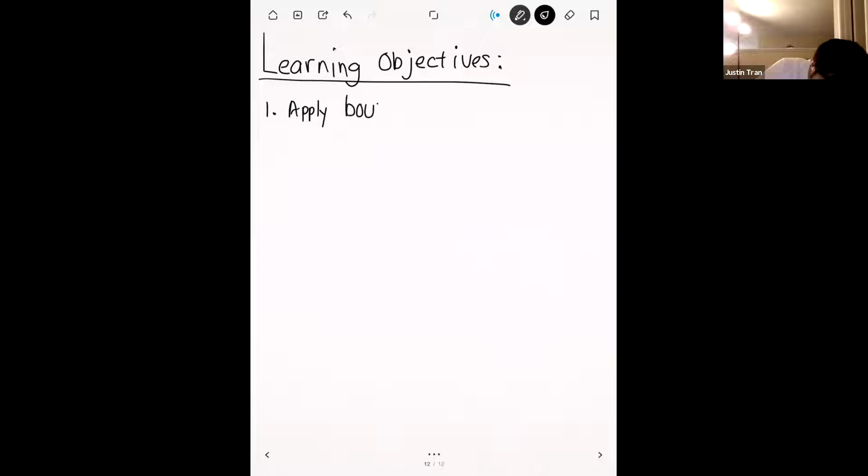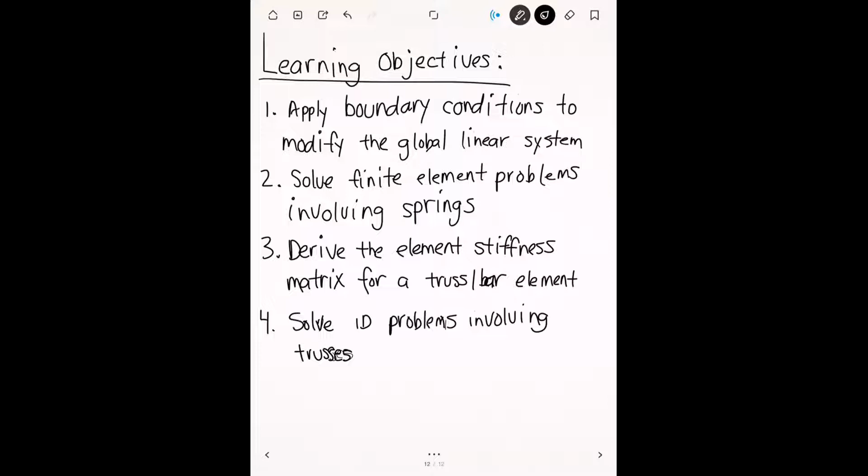Good, how about you? Busy. Good, busy, yeah, that sounds about right for this time of the semester.

Hopefully everyone's taking care of themselves. I know a lot of you are seniors, so senior design is probably ramping up quite a bit. This is usually the time senior design starts to dominate your life, so best of luck with that, but always remember your health and mental well-being comes first. Make sure you're taking care of yourself.

The plan for today is we're going to finish up our lecture notes on the direct stiffness method. We don't have too much more to go, just need to learn how to apply boundary conditions and do an example. That shouldn't take too long, and after that we'll start our next set of lecture notes, which is on trusses.

And what you'll see from trusses is that it's just another application of the direct stiffness method. It's just that the element stiffness matrix will look a little bit different.

But before that, I wanted to do a quick Ansys demo for you guys. It's not an activity, but over the last week a lot of people have been getting started on their projects, and the question I've been getting the most is how to come up with different loading scenarios. So I have a quick demo to help you come up with some other stuff, to help you better model certain situations you might have in mind.

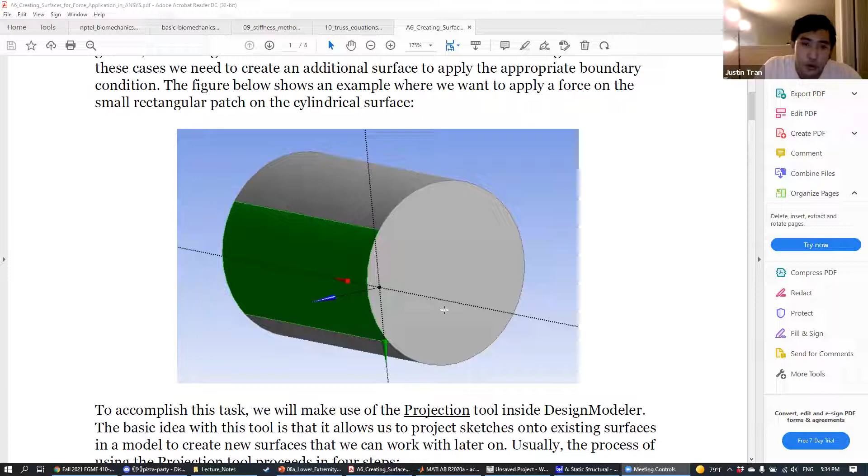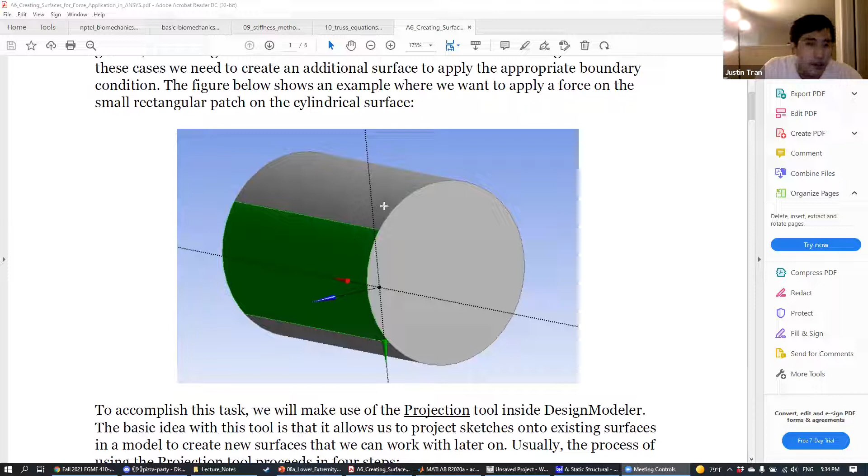If you have a certain type of geometry—I think this is probably most common for circular types—let's say you want to apply a boundary condition on just one region of the surface. Normally Ansys will model the entire cylindrical surface as one, so if you click anywhere on that surface, it selects the entire thing. But a lot of times you don't want to apply a boundary condition on the whole surface, sometimes just a small region. By default, Ansys doesn't let you do this easily, so what I'm going to go over today is how you would actually apply this in practice.

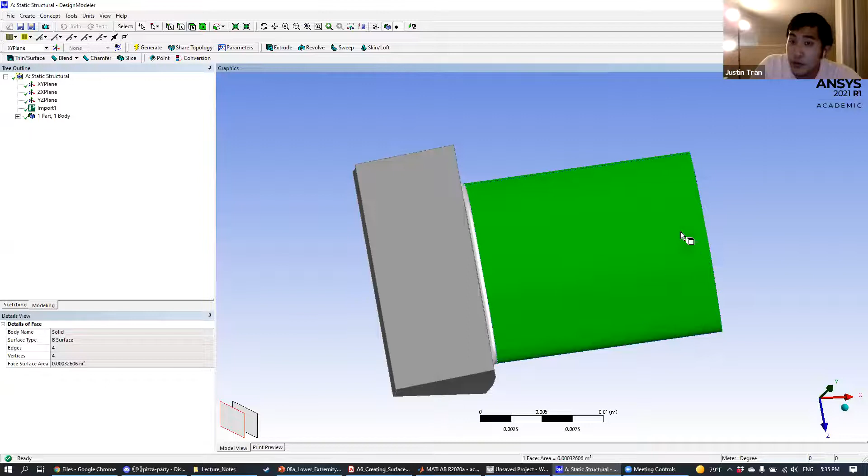I'm not sure if people are doing this one, but I think it's a really good model for applying a boundary condition on a surface, because you have a very large curved surface here, and maybe you don't want to apply a boundary condition on the entire thing. Maybe you want to simulate a case where some rock or object is hitting the turbine blade, but only in a small region. Right now you can't do that, because clicking anywhere on this surface just selects the entire thing. But let's say we want to apply a boundary condition on just a small region. The way we do this is we have to start with a sketch.

With the surface selected, click on sketching. This creates a new sketching plane within the plane of the surface. From there, you draw a region where you want to apply your boundary condition. Let's say I want to apply a boundary condition in a small circular region on the bottom right side of the fin here.

I'm going to draw a circle, let's say it's just about that big. Let's put some dimensions on this so we can see. For the diameter, let's set this to 0.0015. I'm just doing arbitrary values right now.

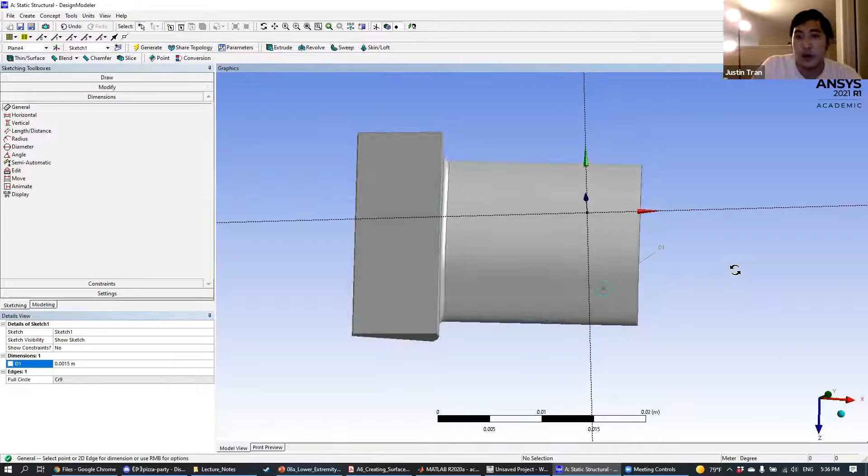Now that I've drawn this circular sketch, I want to project this sketch onto the turbine blade. That's going to create a new selectable surface for me to apply boundary conditions on. Now that we've drawn the sketch, that's all we have to do there, and you just define your region from there.

From here you have to do a few different steps, and this next one is a little non-intuitive. In order for Ansys to recognize this as a valid sketch of the geometry, you actually have to create a solid model from it. But we don't want to create an actual solid here, we just want a fake surface or fake solid, just so we can project this onto our geometry.

Since we've created this new sketch, sketch 1, we're going to perform an extrude. For the extrude, we're going to extrude this sketch in a certain direction. Let me lower this and make it a little bigger so you can see.

It's a little hard to see, but from this circle right here, I'm basically extruding a cylinder that looks like this.

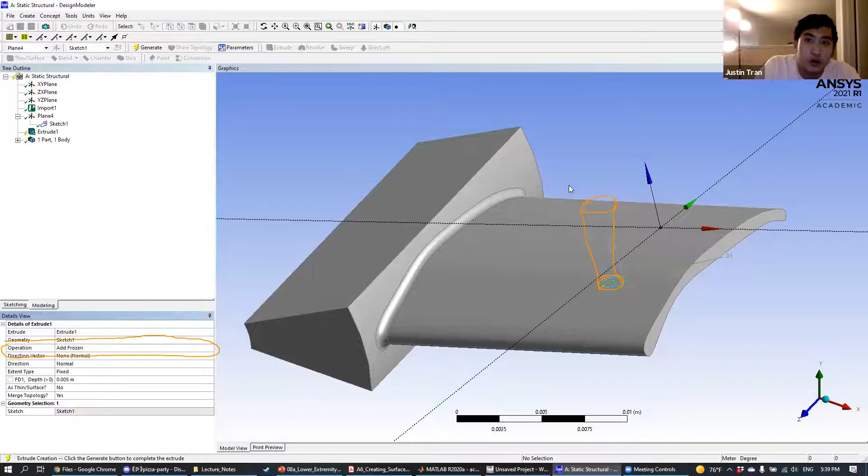What that's going to do is add a new frozen body, which is something we're not going to actually use in our geometry. Once you've specified add frozen, you can go ahead and click generate. You can see here that we've created this new appendage.

Now that this cylinder is an actual solid, we can take the sketch we created and project it onto the turbine blade. To do that, we go to Tools, and then Projection.

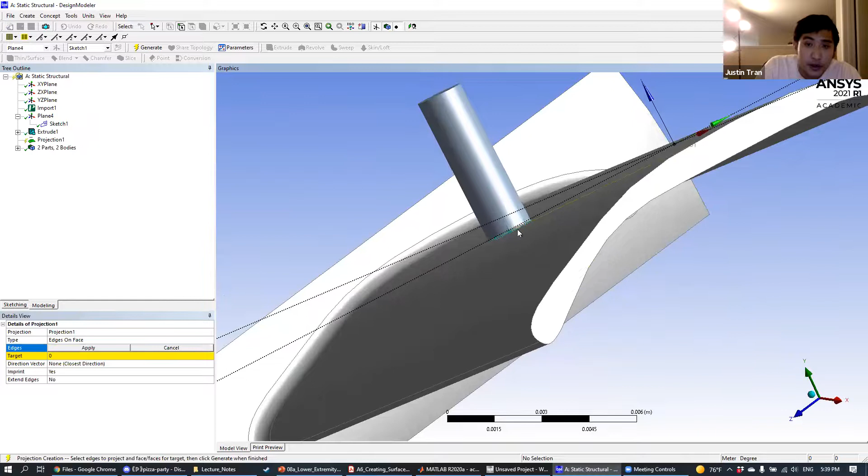Projection lets us take an edge of a surface we just created and project that onto another surface. The first thing we do is select our edge, so let's go to our cylinder down here and select the edge of that cylinder.

Then we have to select the target surface, which is what we're going to be projecting onto. I'll click on target and click on this entire surface, then hit apply. Once you've selected the edge and the target surface, we can go ahead and click generate.

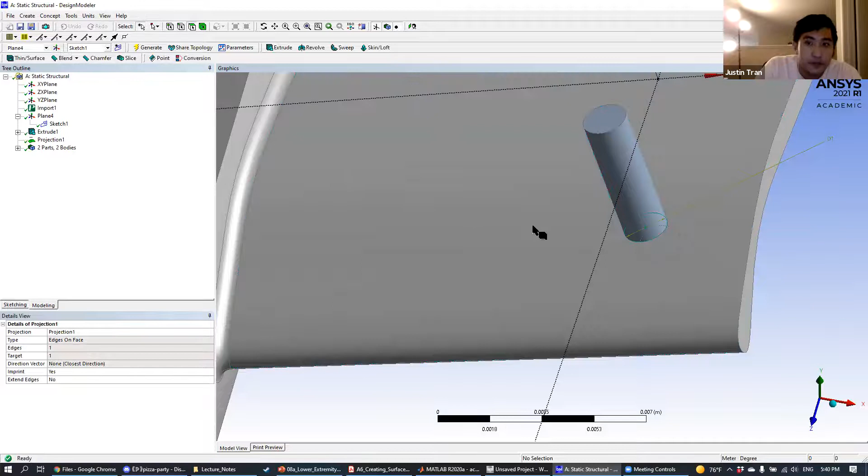Before, when we clicked on this turbine surface, it would make the entire thing green because that's the surface of the turbine. But now that we've projected this little circle, it's selectable for us to apply a different boundary condition.

If we want to apply a boundary condition, say we have an object striking this turbine blade here, then we can do that.

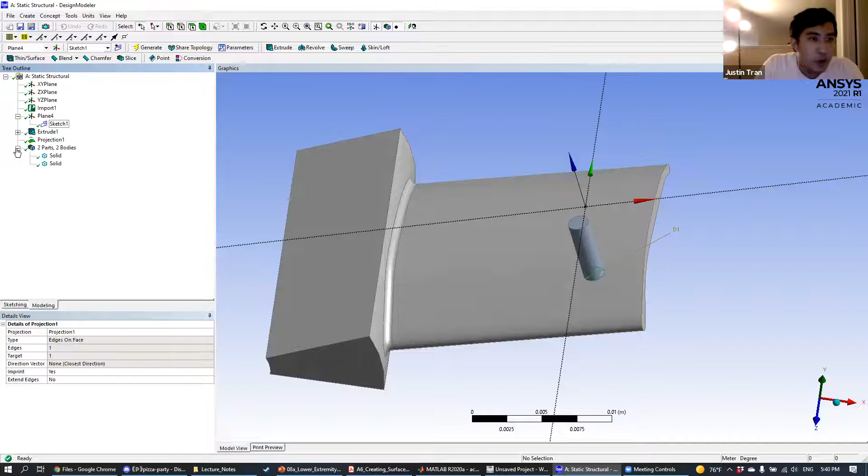The last thing we have to do is deal with this cylinder we created just for this projection, but we don't need it, so let's go ahead and suppress it. If you open up this tree, which shows all the different parts and bodies in your geometry...

You'll see the second body here is the one we just created. All we have to do is right click this and suppress it. Now we're back to our original geometry without any appendage.

Now we can select this little region right here to apply boundary conditions. If I close Design Modeler and open this up in Ansys, it'll let me select this little area to apply a different set of boundary conditions.

I just wanted to demo that really quickly, in case you find it useful for your project. You can use this technique to create different surfaces and be a bit more creative in the types of loading scenarios you come up with.

What was the benefit in doing the frozen?

In order to do the frozen—right now, just this sketch by itself isn't actually a valid surface, it's just a sketch. Ansys allows you to make a sketch maybe just for labeling purposes, but it's not actually part of the model yet.

If you go back to our projection method, part of the projection was that we had to select an edge, and that edge has to be part of an actual solid surface. We can't just select the sketch by itself and have that be an edge. So the reason we made it frozen was to take the sketch, extrude it a little bit, and from that create a valid edge. Then with that, we were able to project that edge onto the surface.

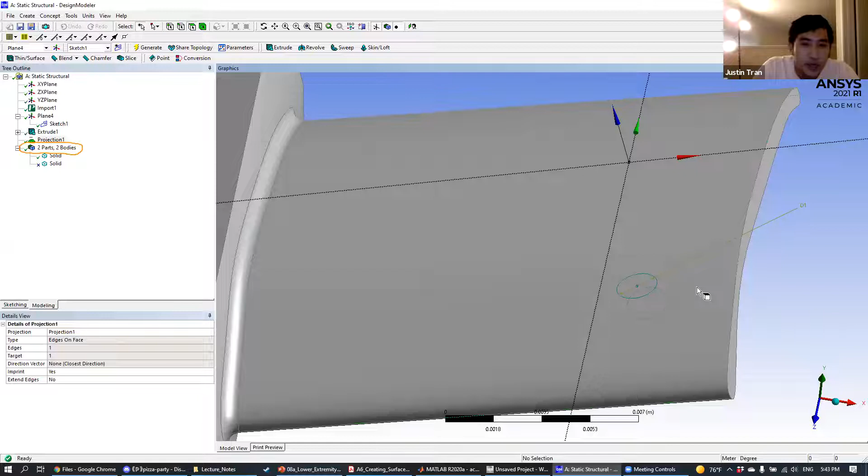Yeah, it's definitely not intuitive. You'd think that you would be able to project the sketch by itself, but I think the reason they have that is just so that you can create sketches without affecting your geometry at all.

All right, any other questions on this? Yeah, I have two quick questions. I got here a little late, so the plane that you made, it doesn't matter if it's exactly on the geometry. It could be offset off of the geometry and it would still work?

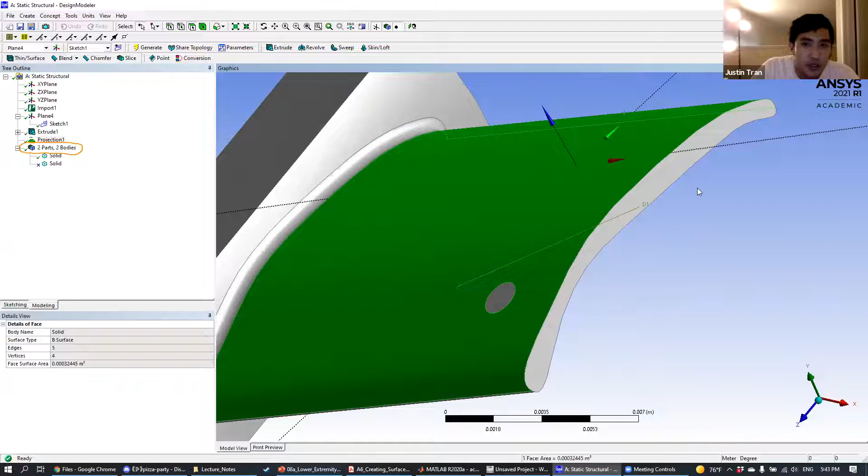Yeah, you can have it off the geometry. Actually for this one, you can see the plane I picked is a little bit off. I think the most convenient thing if you want to project something onto a surface is just to click on that surface, or I'll do a new one so you can see. Let's say I want to project something onto this surface. If you select that surface and click on the sketching button here on the left, Ansys is automatically going to create a sketching plane that's within the plane of that surface.

But if you select a curved surface, like this bottom one, and then click on sketching, the sketching plane it selects is going to be somewhere coincident onto that surface. But you can create the sketch anywhere on here, and then project it onto the surface. So if it's off by a little bit, that's totally fine.

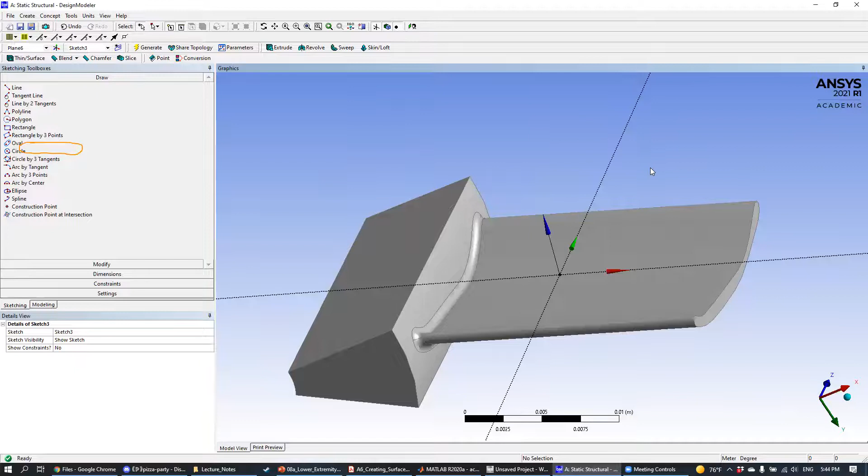Okay, thank you. And my other question is, then once we go back to the model, to the design model, we would have to change the thickness to be really small, right?

Actually, this method is a little different than in activity 3. In activity 3, it's the same idea where we want to create another surface for boundary conditions, but activity 3 actually created a shell on that surface. This is a little different — we're marking a different region on the surface, and we're not creating any new bodies here. So you don't have to specify any thickness at all; it's just a marked region of the geometry.

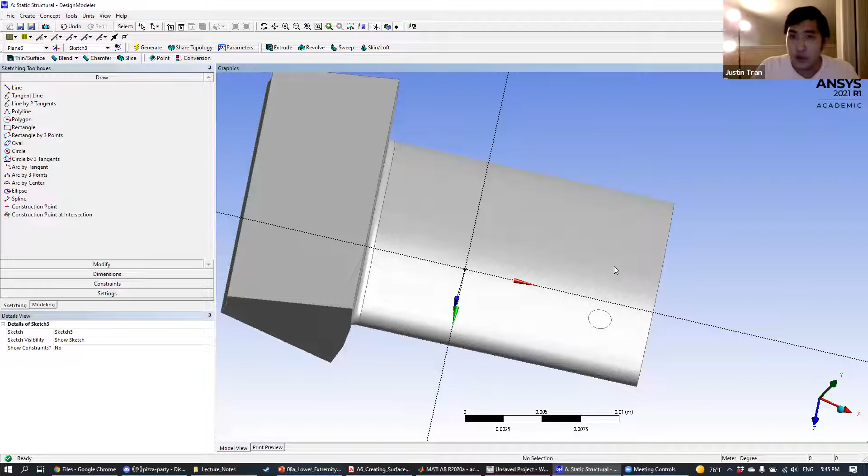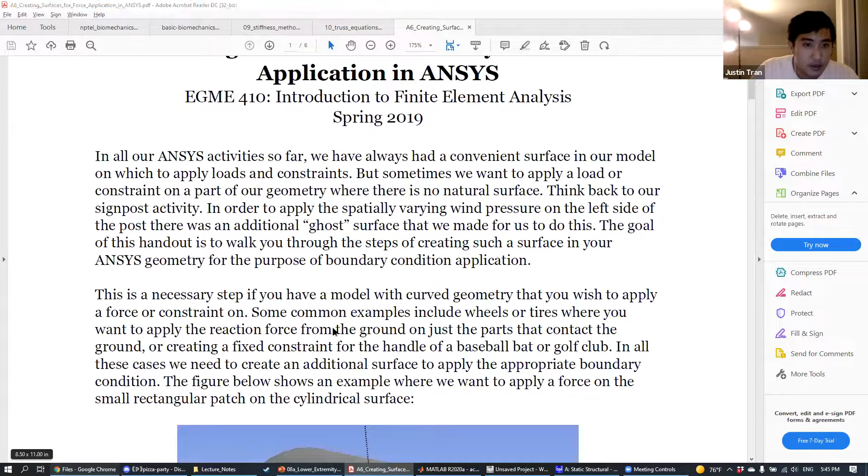Yeah. Okay, thank you. Yep. All right, hopefully that's useful for your project. If you want to read a document that goes through this, lecture notes A6 covers it, and you can find that here on the website. So let me go ahead and bring back my iPad.

We can go ahead and continue our lecture notes from Tuesday. On Tuesday we were discussing this direct stiffness method. The idea with the direct stiffness method was to give you guys a sense of how the finite element method actually works in terms of the mathematics and the setup, because so far all we've been doing is working in Ansys, which is a beast by itself.

Anytime you're learning new software, it's always a challenge. But as part of the finite element class, with this being the only option you have as undergraduates, it would be a crime not to show you a little bit of what's going on underneath the hood, particularly with regards to a lot of the terminology that's used.

Last time we talked about the element stiffness matrix and things like assembly and linear systems. These are all terms that are very ingrained in the finite element community. If you left this class without really understanding what those are, and someone tries to talk to you about it in industry, I'd be doing you guys a disservice if I didn't cover that stuff. We're in the middle of going through this entire process, but before we pick up where we resumed, let me summarize that whole process for you here.

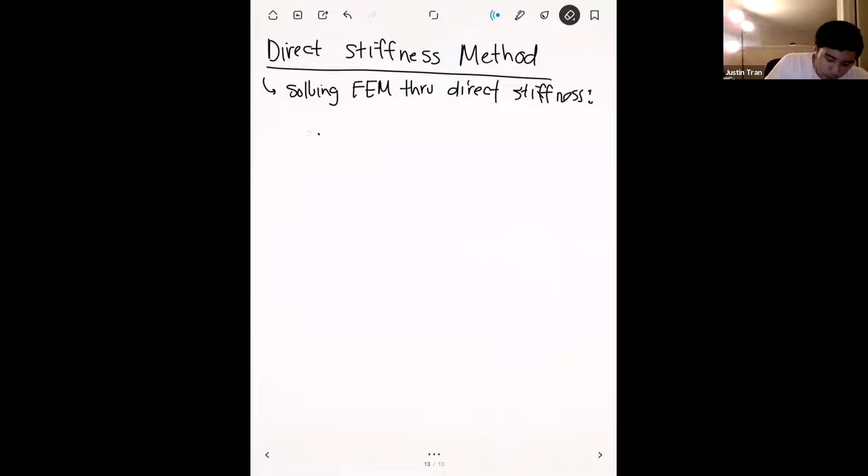The first thing you're going to do when you come across these direct stiffness problems is to form the element stiffness matrix for all the elements in your geometry.

So far we've only gone over a single element type, and that's a spring. But that's enough to get us started. Over the next couple of weeks, we'll be going over how to come up with a truss element stiffness matrix, and even a simplified beam. That's kind of where we're going.

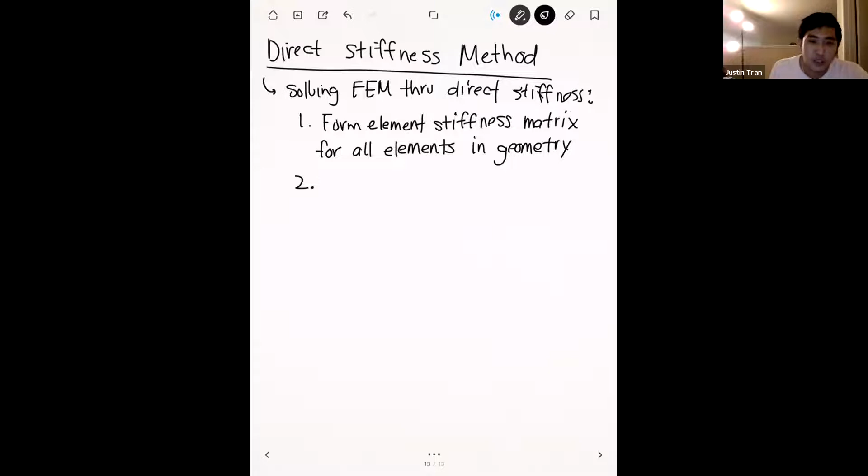The only thing that's really going to be different over the next few weeks is step 1, trying to determine what the element stiffness matrices are. Steps 2 and 3 are going to be the same for all of the direct stiffness problems that we have. Step 2 is to assemble.

So step 2 is assembly. Remember, assembly means to basically form the global linear system, because all the element stiffness matrices are kind of little baby linear systems. In order to solve for everything at once, we need to combine everything into one big linear system of equations.

Step 3 is kind of where we left off. Step 3 is to apply boundary conditions. The net effect of the boundary conditions, or what they're going to do, is modify our global linear system.

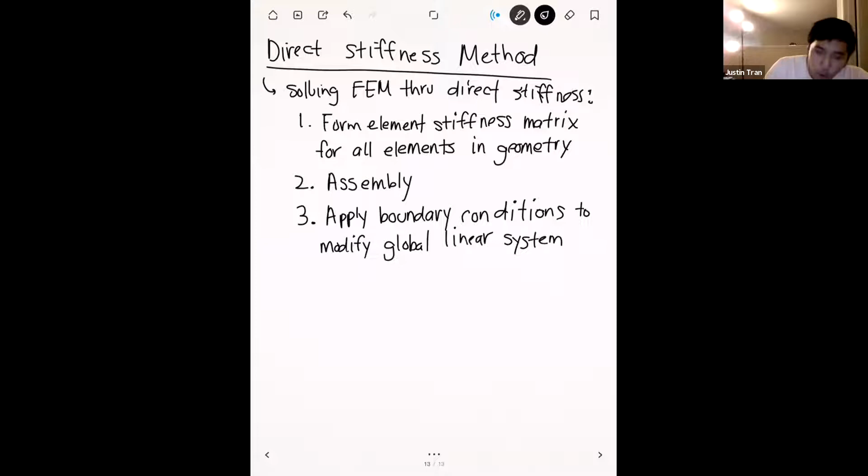The goal with the boundary conditions is to make it actually solvable. Because if you remember from Tuesday, after we assembled all of our element stiffness matrices, we ended up with a singular global linear system, which is something that we can't solve right now because you can't find the inverse of a singular matrix.

Once step 3 is done, that's all the hard part, and step 4 is simply to solve. Because these linear systems can get pretty big most of the time, this solve step most of the time is going to be performed with some kind of numerical tool.

The one I use is Matlab, just because that's what I'm familiar with. But apparently you can also solve linear systems in Excel too, or even, I know there's probably a bunch of websites out there where you can just punch in the numbers and solve it.

For this class, when I assign problems to you for homework, you're going to end up with big linear systems. I do not want you guys solving those by hand. I mean, you're welcome to, of course.

If you're really into that stuff, I'm not going to stop you. I personally am into weirder stuff than solving linear systems by hand, but that's why I'm not going to judge you. But I think for most people, it's going to be more time than it's worth.

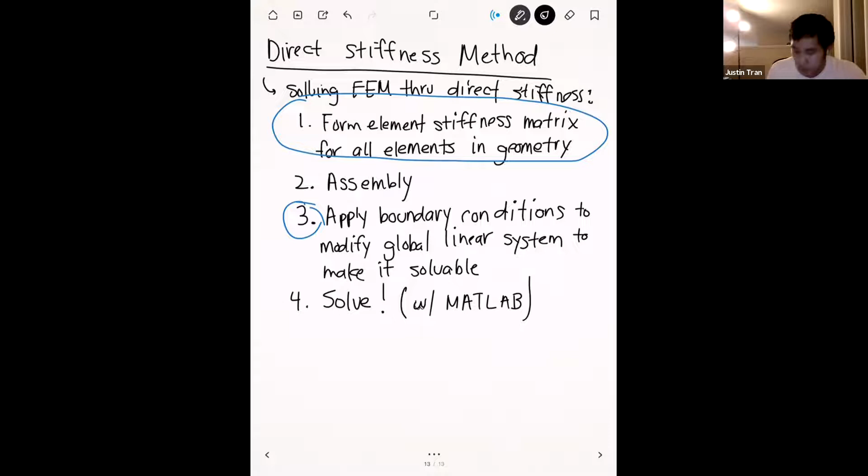All right, let's go ahead and pick up the walkthrough, not really an example, but the walkthrough of what we were doing before, and then let's talk about how we can apply boundary conditions.

The situation we were looking at: we had 2 springs connected to each other in series, and we're pulling on the springs with a force F. Our 2 springs have spring constants Ka and Kb - I'm using numbers for the nodes and letters for the elements.

The nodes: we have node 1 attached to the wall, node 2 between the 2 springs, and node 3 on the outside. Last time we formed the element stiffness matrices and assembled them into the global system.

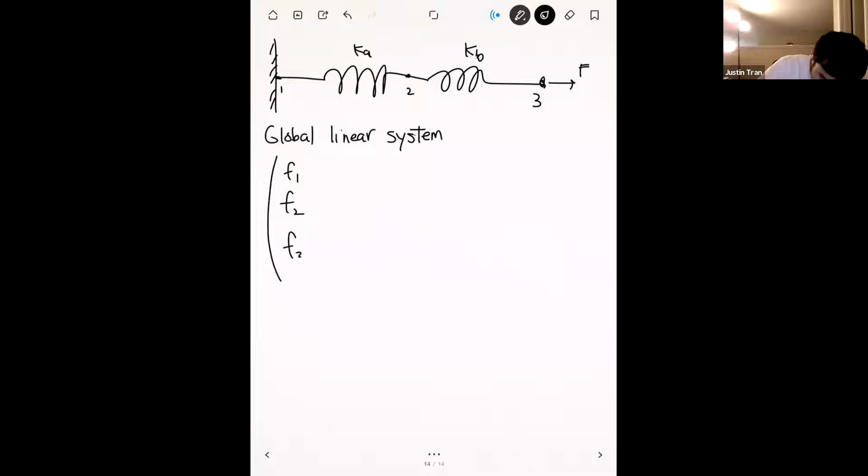Then we got a global linear system that looked like this. We had 3 nodes, so we have a 3 by 3 system: F1, F2, F3 equals the matrix Ka, -Ka, 0, -Ka, Ka+Kb, -Kb, 0, -Kb, Kb, multiplied by D1, D2, D3.

Remember, the way we got this was by placing the element stiffness matrices in their respective locations. Element A took up these slots because it was modifying nodes 1 and 2, whereas element B was occupying these slots because it was modifying nodes 2 and 3.

The next step to actually make this solvable is to apply boundary conditions. Just like I mentioned on the previous page, the boundary conditions are going to modify this linear system in order to make it solvable.

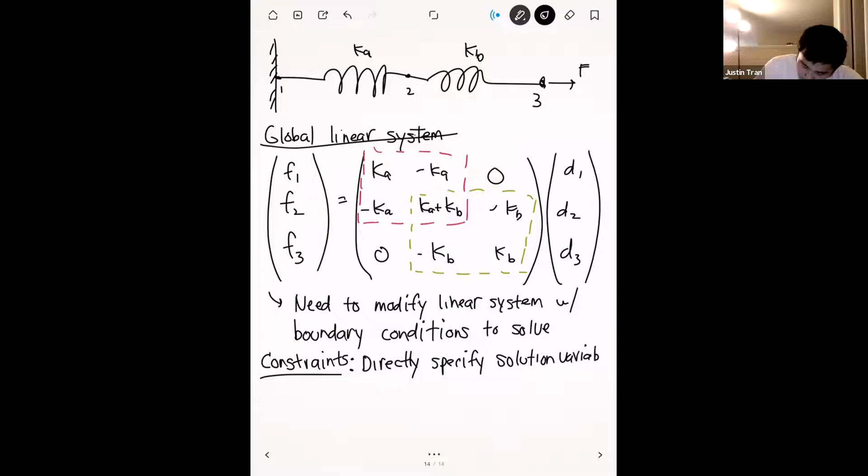So if you look at our geometry here at the top, and if you look at nodes 1, 2, and 3, you can see that node 1 here is subject to a constraint - in fact, it's fixed to the wall.

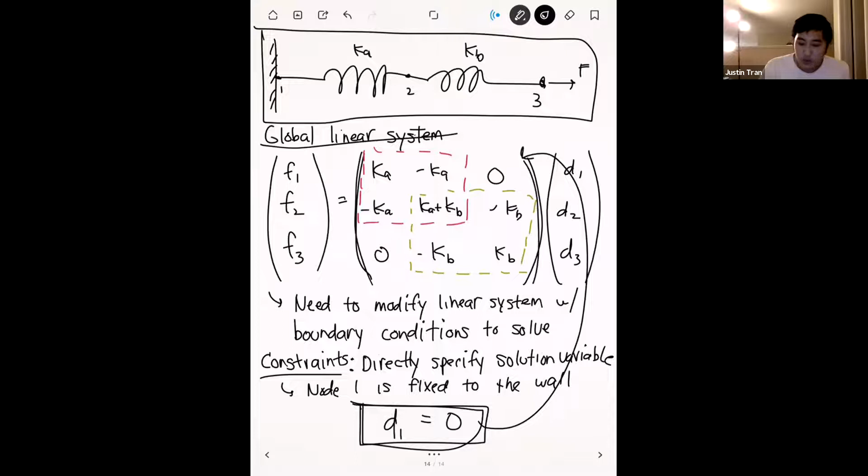To motivate what we're going to do, let's remind ourselves that this global linear system represents a system of 3 equations and 3 unknowns. To see that, we can perform this matrix multiplication. If we take this row of the matrix and multiply by this column vector, that's going to give us our first equation.

Just reading off the first row in the matrix, what we have is F1 is equal to KA times D1, minus KA times D2, plus 0 times D3. If we multiply across the first row in the matrix, that's exactly what we get, and so we get this equation.

Let's compare that to our boundary condition. Our boundary condition basically says that D1 is equal to 0. So another way we can say that is 0 is equal to D1.

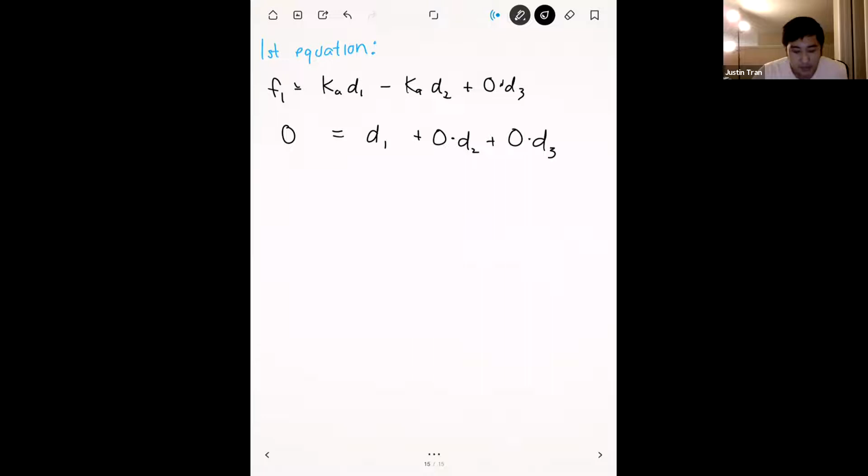Let me augment this equation to also include D2 and D3. If I augment this equation to say that this is also equal to 0 times D2 plus 0 times D3, when we multiply 0 by D2 and D3, it gives us basically the exact same thing, because 0 times D2 cancels out, 0 times D3 cancels out, and we still get D1 is equal to 0.

So why would I go through the trouble of adding these terms if they just cancel out anyway? The reason I did this is so that I can match the same form as the equation up here. You can see, if we compare this to the equation we got from the matrix, we have a D1 term, a D2 term, and a D3 term.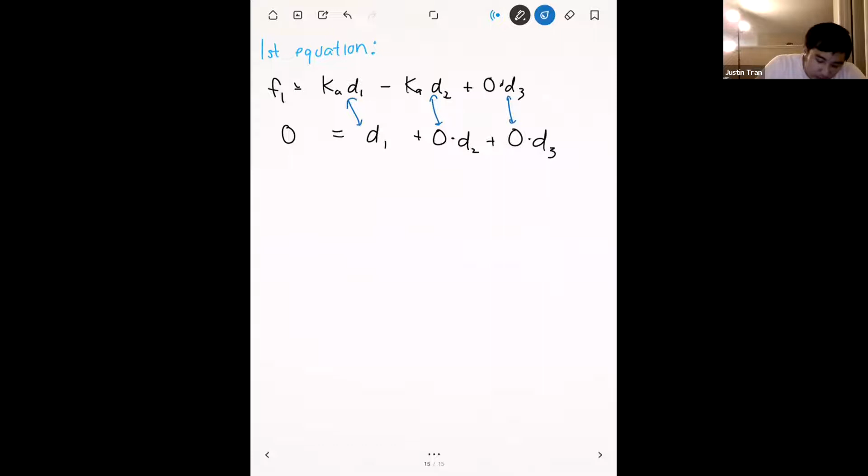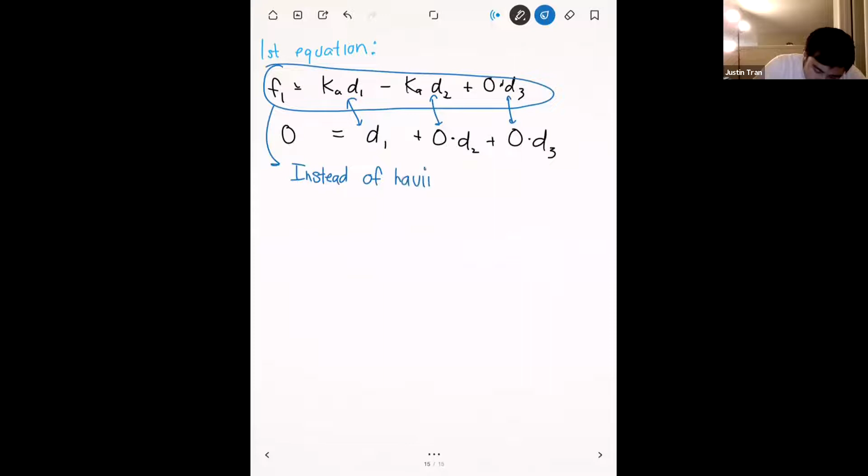So basically what we can do is say that instead of having this equation, why don't we just replace this with an equation that represents our constraint boundary condition?

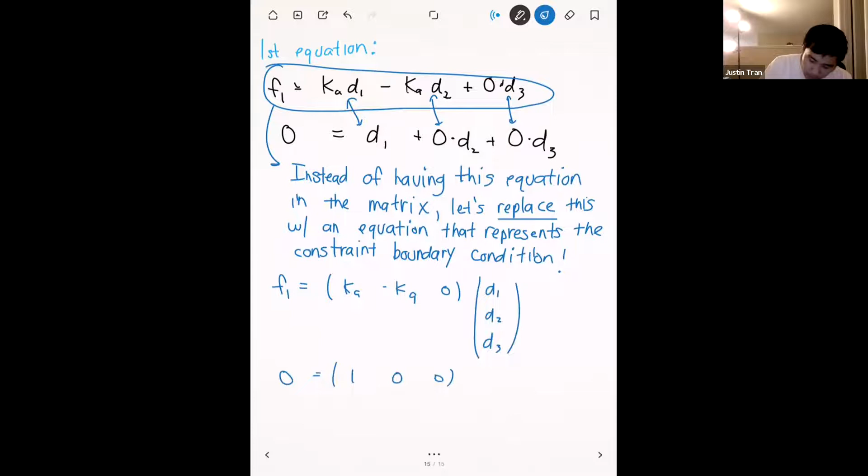So what would that row in the matrix look like? Right now we have F1 is equal to KA, minus KA, 0, times D1, D2, D3. What if we instead replace this with 1, 0, 0 times D1, D2, D3? This is an equation that will satisfy our boundary condition much more than the original one, so let's cross that one out.

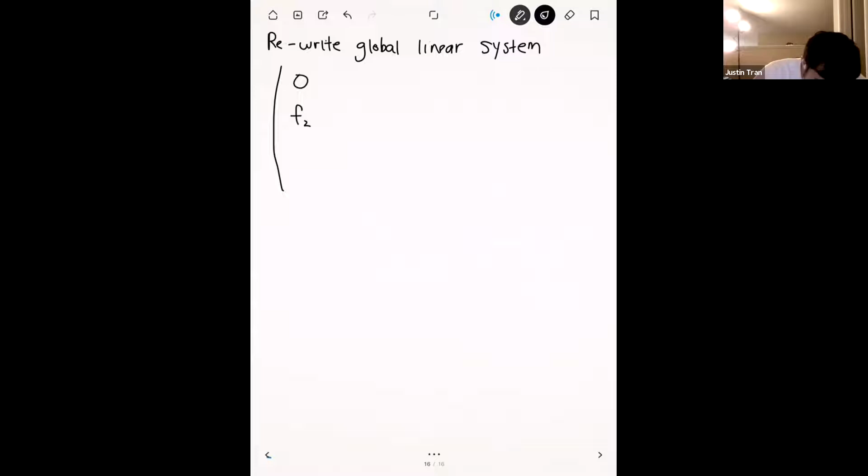Now let's rewrite our global linear system with this new equation instead of the old one. Before we had F1 up there, but instead we're going to have a 0 now, and the first row is now going to be 1, 0, 0. But the rest of the matrix stays the same: minus KA, KA plus KB, minus KB, 0, minus KB, and then KB. We have D1, D2, D3. So this is now our new linear system with the constraint boundary condition applied.

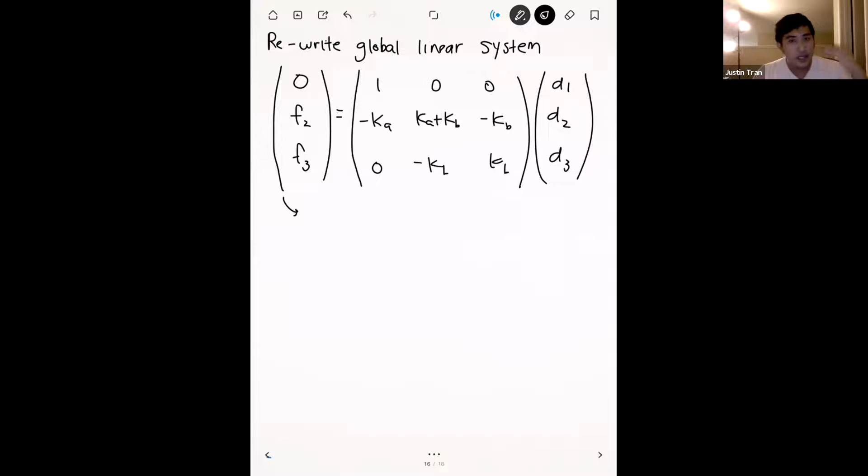So just to summarize what we did: whenever you have a constraint type boundary condition on a node, you're going to replace an entire row in the matrix with that boundary condition.

That's how we're going to do that. Any questions on constraint boundary conditions?

Is this saying that the applied force is 0, or could there still be reaction forces? Yeah, there could definitely still be reaction forces, and actually there will be, because there's a fixed support. But all we're saying right now is that the displacement is going to be 0, because when you're first solving the system, the thing you're solving for first is actually this.

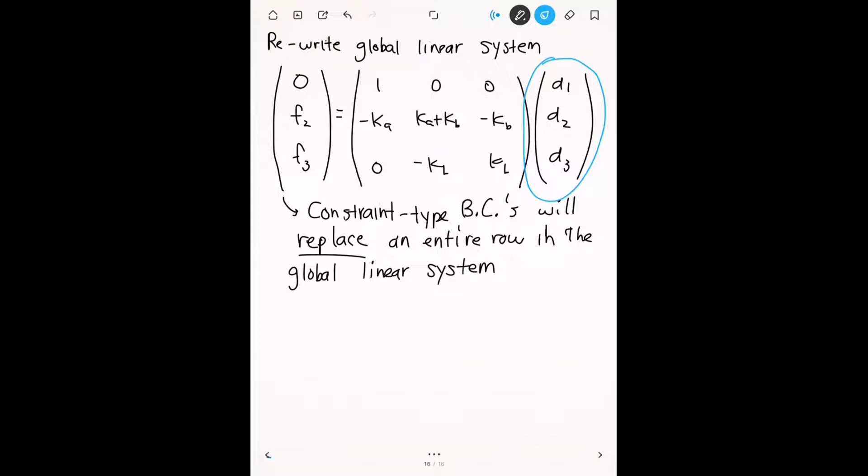Remember, displacement or deformations are our primary variables. So the first thing we solve for when we solve this linear system is that. And then once we have that solved, we can compute reaction forces from there. Okay, thank you. Yep.

So those are constraint boundary conditions, and that's actually the more complicated one. When you're doing these finite element problems, I would say do your constraint type boundary conditions first, because that changes the matrix quite a bit.

Next we have our loads types. Loads are really easy, because loads are not going to touch the matrix at all. The only place loads are going to modify is in the forcing vector, which is this vector off on its own on one side. So when you have load type boundary conditions, you basically just plop them right into the forcing vector.

Basically we're going to go load node by node here, and see what loads are being applied there. So if you have a node where no load is being applied, then you just put 0 there.

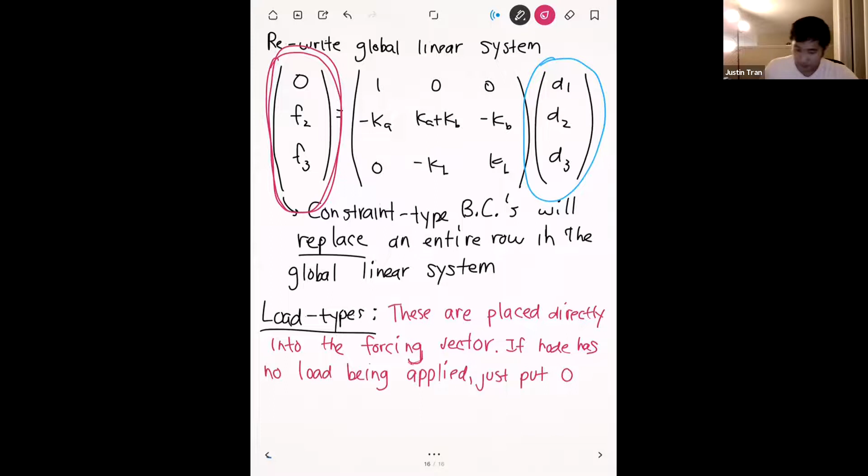Let's go node by node and see which loads are being applied. Let's start with node 2. We're not really doing anything to this node, so the load F2 is going to be 0. Then for node 3, you can see that we have a positive force F, so our boundary condition there is going to be just positive F.

Let's go ahead and put those in. For node 2, we have no load, so we put a 0 there. But for node 3, that's where our external load's being applied, so we're going to apply a force of F right there.

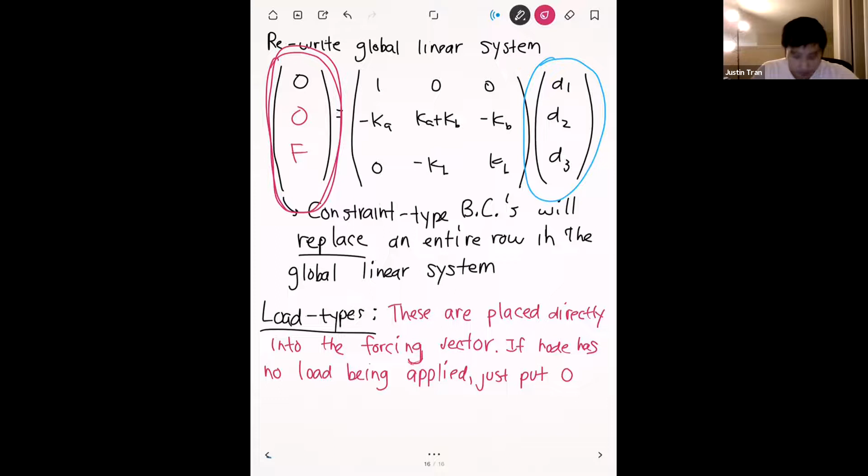With those things settled, we settle upon our final global linear system, and this one is ready to solve. Presumably you'll be given the values for the spring constants, and of course you'll be given the values for the loads. So this is a matrix you can just pop into Matlab or whatever your favorite way to solve linear systems is, and you'll be able to solve for D1, D2, and D3.

Next I'm going to do an example that takes this process from front to back, and has numbers in it too, so we can see the entire process in action. Before I do that example, are there any questions on this? Okay, let's go ahead and do that example. I think with the symbols and the fact that we went really slowly, it's hard to get a good sense of how everything fits together, so hopefully with this example it'll be a bit more clear.

Let's say we have a spring system that looks like the following. We have a wall right here, and one spring attached to the wall. Now let's say this spring is attached to a wooden block, and this wooden block itself is attached to two springs: one spring up top right here, and another spring right here.

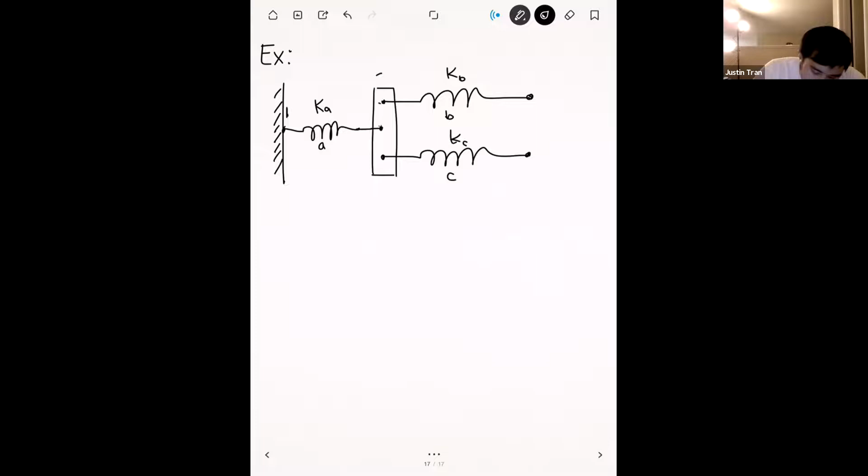And then the nodes, we have to label the nodes too. Node 1 is going to be attached to the wall on the left. This entire wooden block, because all these attachments are on the same block, this entire block is all going to move together, so we'll call this entire block node 2. This top node on the right we'll call node 3, and this node on the bottom we'll call node 4.

And we have two loads being applied, so on node 3 we have a force to the right, we'll call that F3. And node 4, we have a force to the left, we'll call that F4.

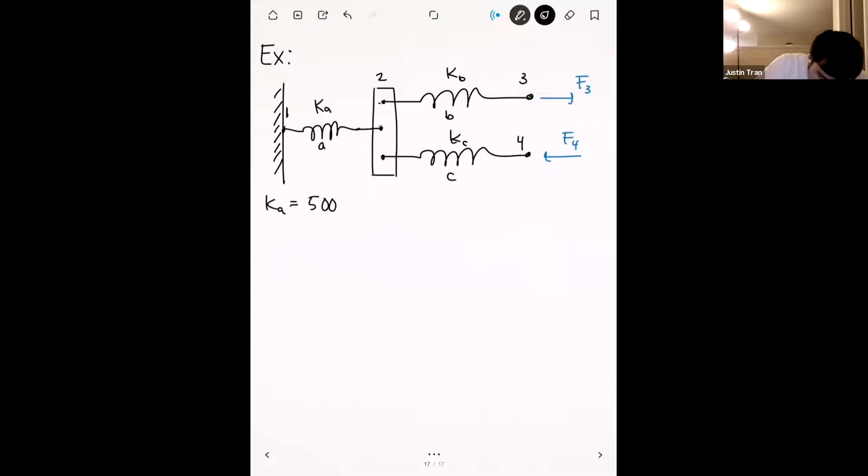Let me go ahead and give values for all of these parameters. Let's say that Ka is equal to 500 newtons per meter. Kb is 100 newtons per meter. And Kc is 250 newtons per meter. And the loads, we'll say that F3 is equal to 100 newtons, and F4 is equal to 50 newtons.

And the goal of this analysis is we're going to use the direct stiffness method to solve for the displacements of all four nodes.

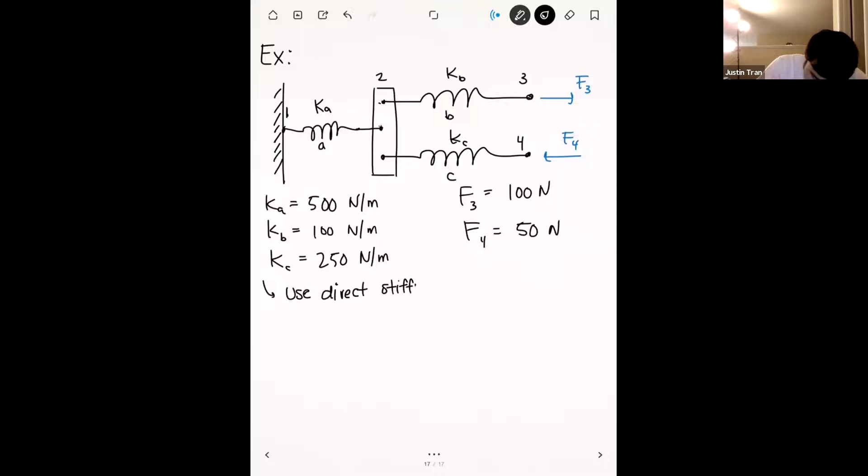This is a fresh, brand new finite element problem, and so we're going to take it from the top and walk through this entire process. Any questions on just the setup for the problem?

So let's go ahead and run through the entire process. Remember, the first thing that you have to do when you come across a problem like this is we're going to write out all the element stiffness matrices for the elements.

So here we have three elements: element A, element B, and element C. So we're going to have three element stiffness matrices, and they're all springs. Remember, for a spring, our element stiffness matrix system looks like the following.

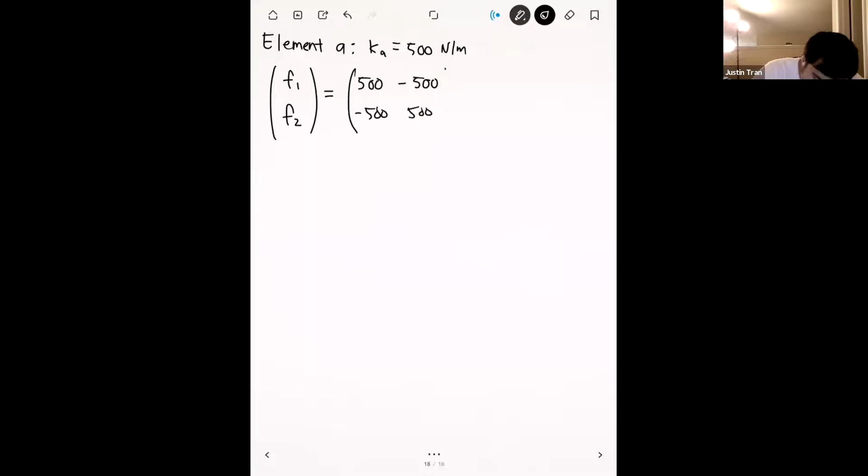Let's start with element A. For element A, remember we have Ka equal to 500 newtons per meter. The element stiffness system for element A is going to be F1, F2, because element A here is touching nodes 1 and 2, so those are the two node numbers that we're going to use. We're going to put in the spring stiffness now: 500, minus 500, minus 500, 500. And this can be multiplied by D1, D2.

Element B has a Kb of 100 newtons per meter, and the nodes that element B works on are nodes 2 and 3. So the element stiffness matrix for element B is F2, F3 equal to 100, minus 100, minus 100, 100, and then D2, D3.

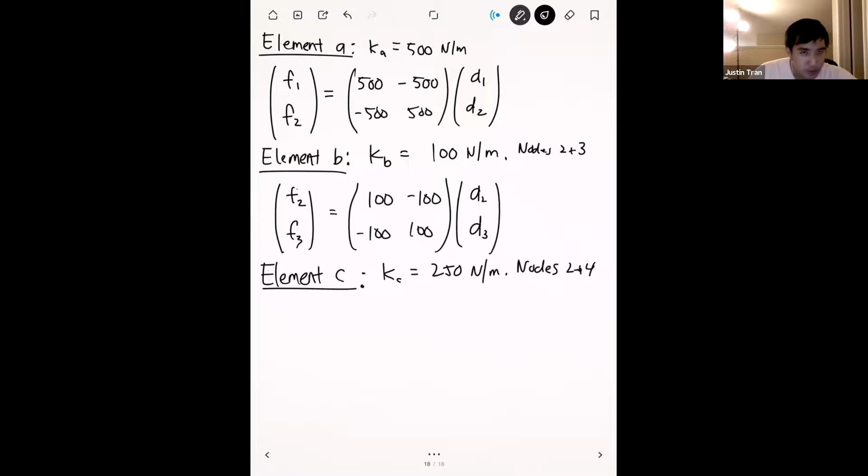Finally, let's do element C. The Kc, or spring constant, for that one is 250 newtons per meter, and the nodes that it works on are nodes 2 and 4. This one's going to be interesting to assemble because it's not all going to be in one contiguous block. So for element C, we have F2, F4 equal to 250, minus 250, minus 250, and 250, times D2, D4.

So we've written out all the element stiffness matrices, and the next step that we're going to do is assembly. Any questions on this?

It wouldn't matter, right, if we have our lowercase f as capital F? Oh yeah, no, that doesn't matter, you can call it whatever you want. Okay, thank you.

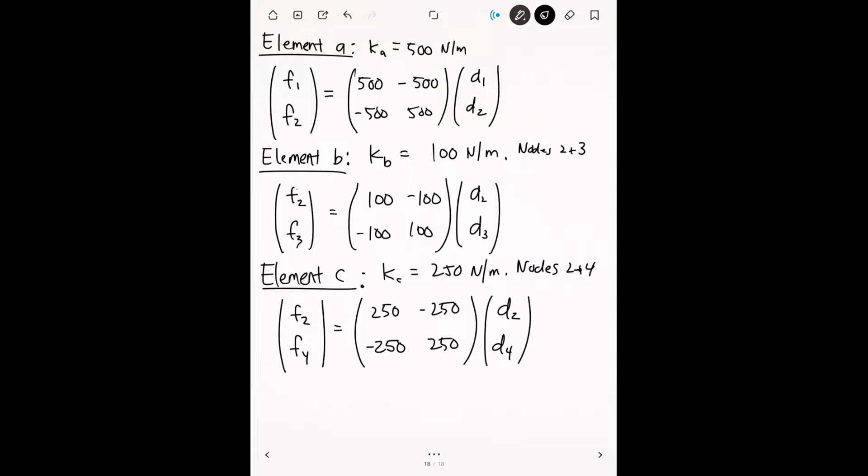Okay, so let's go ahead and put together our global linear system and see how all of these fit together.

All right, and so the next step, now that we have all the element stiffness matrices, is assembly.

Here we're going to have a 4x4 system because we have 4 nodes. So we have F1, F2, F3, F4, and then we have D1, D2, D3, D4. Just to help us with organization, I'm going to go ahead and label the columns as well.

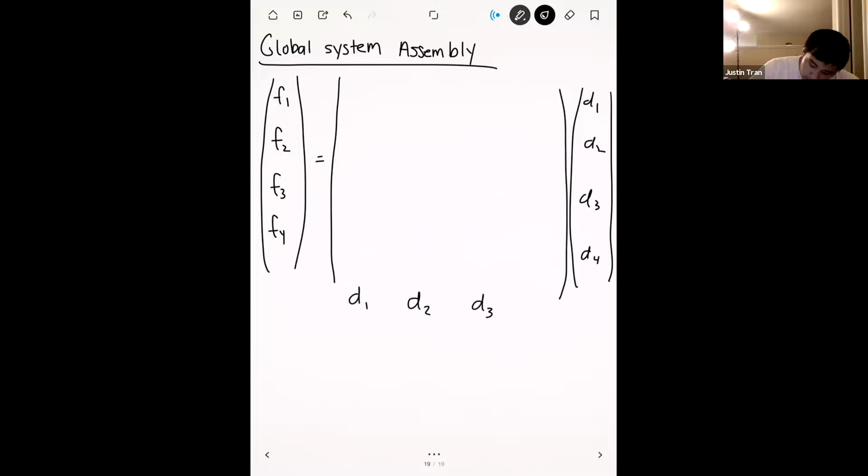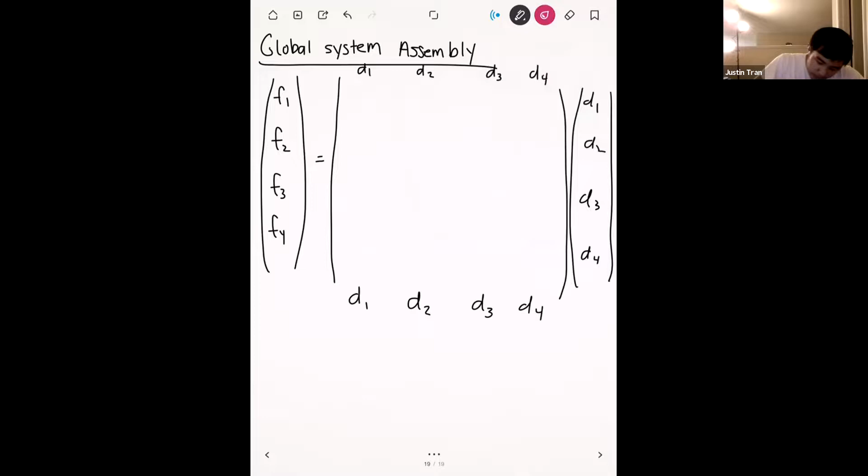All right, let's go ahead and start assembling the element stiffness matrices here. I'm going to use colors just because I can, just to make it a little bit easier to see.

Let's start with element A. Element A we know works on nodes 1 and 2, so it's going to be on the D1, D2 block of our global linear system. We're going to go to all the columns that have D1 and D2 and all the rows that have D1, D2, and you can see that they all intersect in this region right here. That's going to be element A, covering that region because that's everything that has to do with nodes 1 and 2 combined.

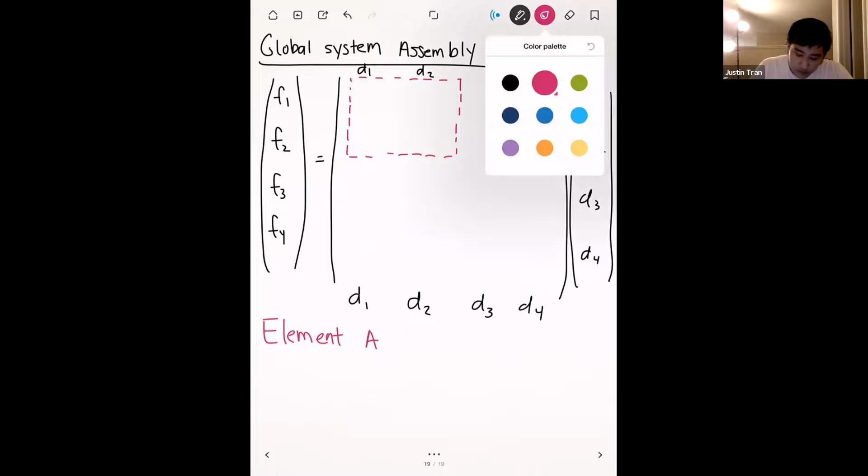I'm not going to fill in the values just yet because I want to focus on just locating these elements first.

Element B works on nodes 2 and 3, so we're going to go to all the rows and all the columns that have to do with 2 and 3, and that's going to cover this region right here. You can see that we have overlap on node 2, the D2 spot, and that makes sense because both elements A and B are going to be interacting on that spot. They both border that node.

All right, finally let's do element C. This is the interesting one. Element C, from the previous page, we know borders nodes 2 and 4, and 2 and 4 are actually not connected in this linear system at all. I think the tempting thing when you're first starting out is to make a box around this region, because that's kind of what we've been doing. But element C here doesn't touch node 3 at all. If you go back to our original diagram, node 3 is up here, whereas element C is down here.

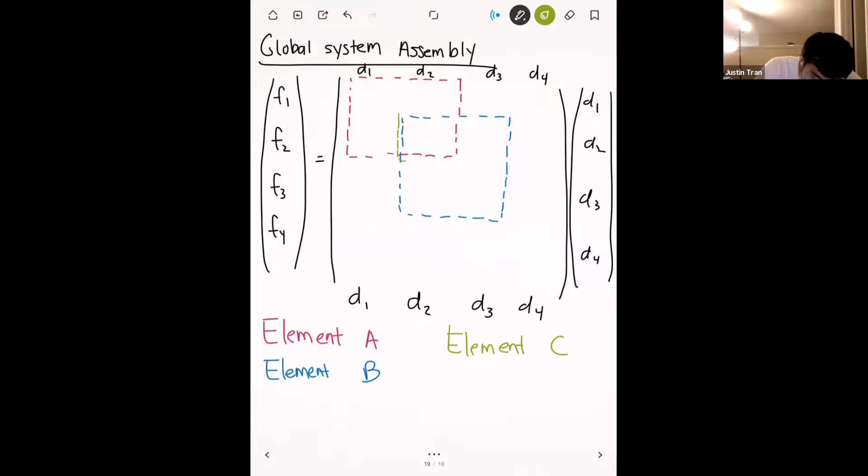Let's start by looking at all of the regions that are crossed by 2 and 4. The first one we're going to do is D2, D2. We have the D2 column right here and the D2 row right here, and you can see they intersect on this D2, D2 spot. So we're going to have another green border around here. This spot right here is very popular, so all 3 element stiffness matrices are going to be modifying it.

Next we have the D2, D4 slot. We have the D2 row, D4 column, and you can see they intersect on this spot right here, so we're going to draw another box right here. Same thing for the D4 row and the D2 column, so that's going to be right down here. And then finally we have the D4, D4 spot, which is right here.

All right, and so those are all the locations where you're going to insert the element stiffness matrix for element C. Okay, so any questions on why we chose these locations for these elements?

And of course, just like we did last time, any place that's not boxed, we can just go ahead and fill in a 0 for those locations.

Okay, so now that we have the locations picked out, let's go ahead and insert the values. Let's do element A first. Element A's spring constant is 500, and so we do 500, minus 500, minus 500, 500.

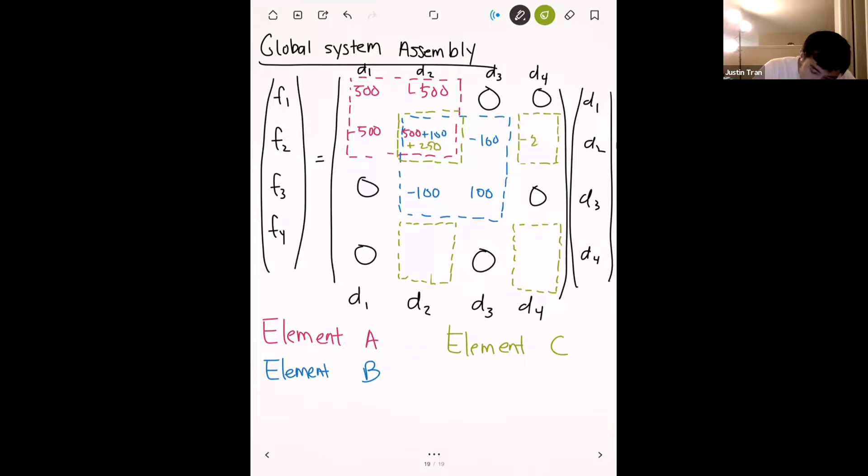And finally, element C. Element C we have 250. So we're going to add 250 on this spot right here - it's getting a little bit crowded. Minus 250, minus 250, and 250.

All right, and so the only place where we actually have any overlap is on D2, D2. So let's go ahead and perform this arithmetic. We have 500 plus 100 plus 250, and that gives us 850 overall.

Okay, and so now we have our linear system here, and then we're now ready to apply boundary conditions. Any questions on how we got this?

All right, and so last thing that we can do here is we can go ahead and apply the boundary conditions so that we can actually solve this. And so we have 3 boundary conditions here.

And so we have one constraint here on node 1. Remember, when we have a constraint boundary condition, that's going to replace the entire row. So we're going to replace this entire row with zeros on all the off-diagonal parts, and then a 1 on the main diagonal.

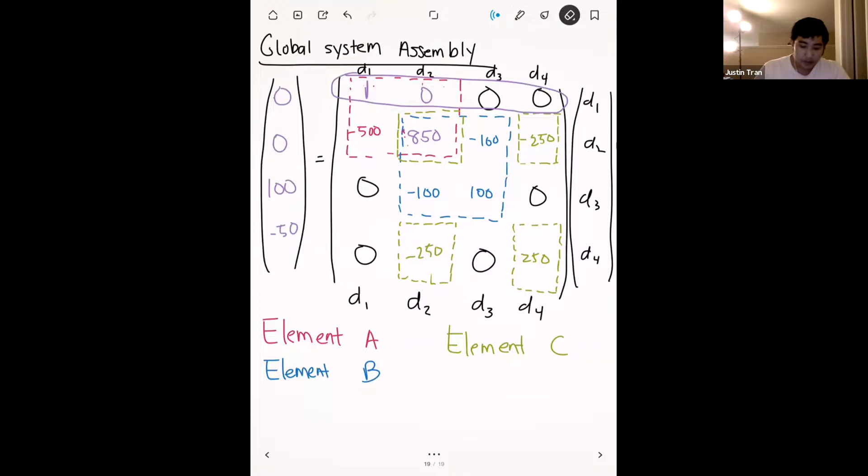And then node 2, since we don't have any loads there, we're just going to put a 0 there. All right, and so now our global linear system is complete.

And so what you can do from here is you can just insert this into Matlab or whatever program that you like to solve for linear systems. And so again, please don't solve this by hand unless you're into that stuff. But I did this in Matlab.

Okay, and so if you do this in Matlab, we get the following solutions. If we plug this in, we get D1 is equal to 0, which makes sense because that's our fixed support.

D2 is equal to 0.1 meters. D3 is equal to 1.1 meters, and D4, because we're kind of compressing that node in, we actually get a minus 0.1 meters.

And there's our solution.

All right, so we have about 15 minutes left, so let me show you the code for how you can actually input this in Matlab, just so that you have those tools available, and then whatever time is left, we'll use that to start the truss equation notes.

Any questions on this before we jump into Matlab?

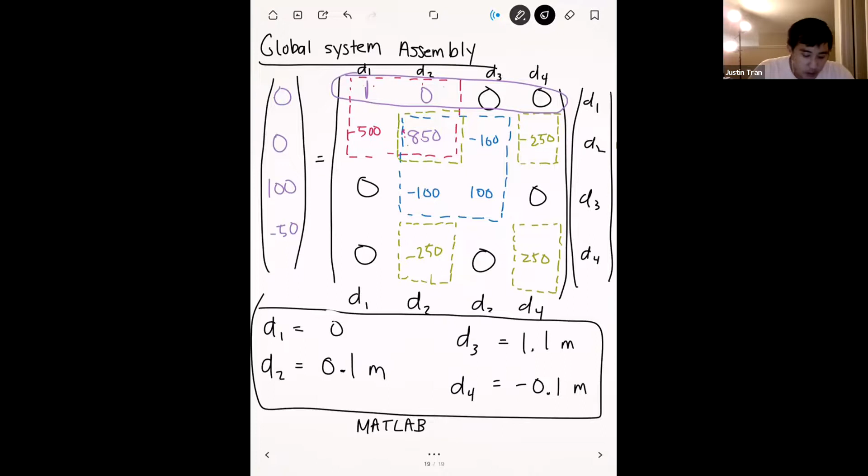All right, so to solve linear systems in Matlab, you basically only need to do a few things. First we're going to basically put this matrix here and encode that in Matlab. Then the other thing we need to do is put in the forcing vector and put that in Matlab. Once those two things are in, then Matlab can just take us from there.

All right, so let me go ahead and switch back to my laptop screen. Let's see, does everyone have this matrix written down? Because we're basically going to be inputting these values kind of directly into Matlab.

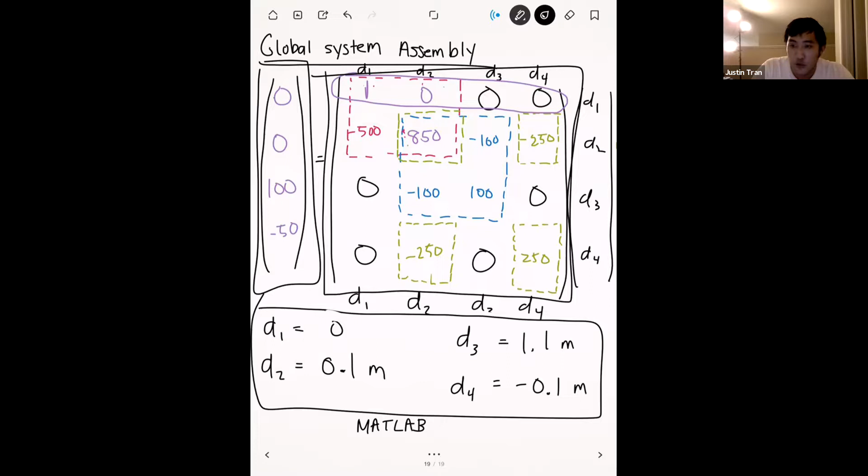Quick question, sorry. Sure, it just popped in - regarding node 2, would it matter the placement of the nodes?

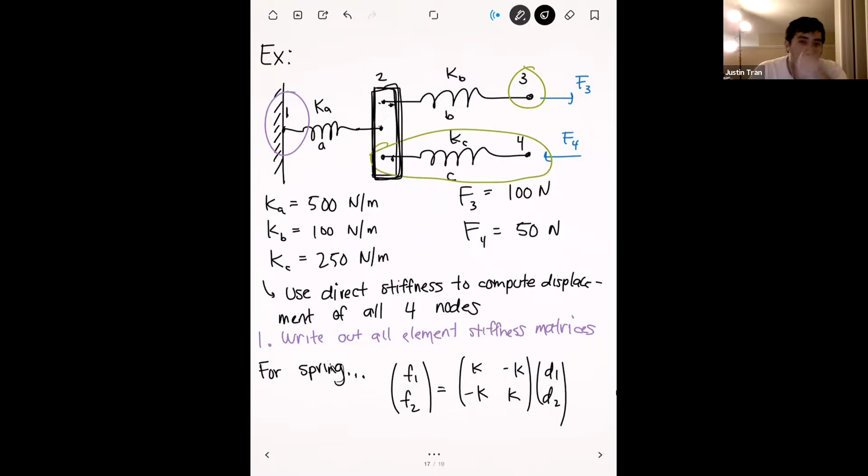In this case, I'm assuming all the nodes are directly on top of each other. But would it matter if the one connected to node 3 or node 4 were offset from that axis? For this case, it doesn't matter too much. The important thing is that all of those things are going to displace and deform together, because they're all attached to the same block, and we're going to assume that the block is relatively rigid. So if you put the nodes off-center, it doesn't make too much difference. The most important thing is that they all move together when we force the springs.

All right, so let's go ahead and jump into MATLAB. I conveniently have it open just because my calculator is out of batteries and I'm too lazy to drive down to the pharmacy to get new ones. Okay, let me go ahead and clear this.

So to solve this system in MATLAB, can everyone see my console? Okay, and if I type this, can everyone read it? Good, I remember before my font was a little too small. So basically what we're going to do in MATLAB is make a matrix that has these values exactly, and a vector that has these values exactly. Then we're just going to tell MATLAB to solve it for us.

The way you use MATLAB, remember, is you define everything in terms of variables. So we need to make a variable that stores our matrix. The variable name I usually use for a matrix is A, because essentially we're solving the linear system AX equal to B. Traditionally the name for the matrix in a linear system is A, or you can be more descriptive and call it the LHS matrix, like I've done before. But you can choose whatever name you want.

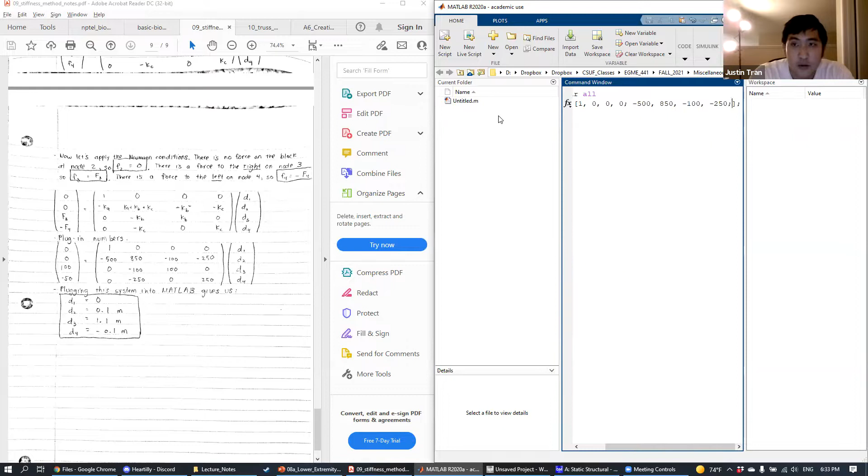To denote a matrix, we use square brackets like this, and we build up the matrix row by row. From the left, you can see the first row is 1, 0, 0, 0. Each entry in the matrix is separated with a comma, and to go to the next row, you use a semicolon. Now we input the next row, which is -500, 850, -100, -250. This is the second row in the matrix, corresponding to this one right here.

Next, we input the third row: 0, -100, 100, 0. Then finally we put in the last row, which is 0, -250, 0, 250.

Once you've input all the entries in the matrix, you can go ahead and hit enter. Once you hit enter, you can see I've created this new variable called A. You can double click it to verify the matrix looks exactly like the one you have here: 1, 0, 0, 0 for the first row; -500, 850, -100, -250 for the next; 0, -100, 100, 0 for the third row; and 0, -250, 0, 250 for the last row. So we're all good in the hood.

Next, we have to define the B matrix, which is going to be our forcing vector on the right side. I'm going to use the same notation that I used for the matrix.

Okay, I'm going to separate every entry with a semicolon. Remember, this is supposed to be a column vector, so the first entry is going to be 0. We're going to do 0 semicolon, 0 semicolon, 100 semicolon, minus 50. That's going to be our right-hand side vector. Go ahead and hit enter.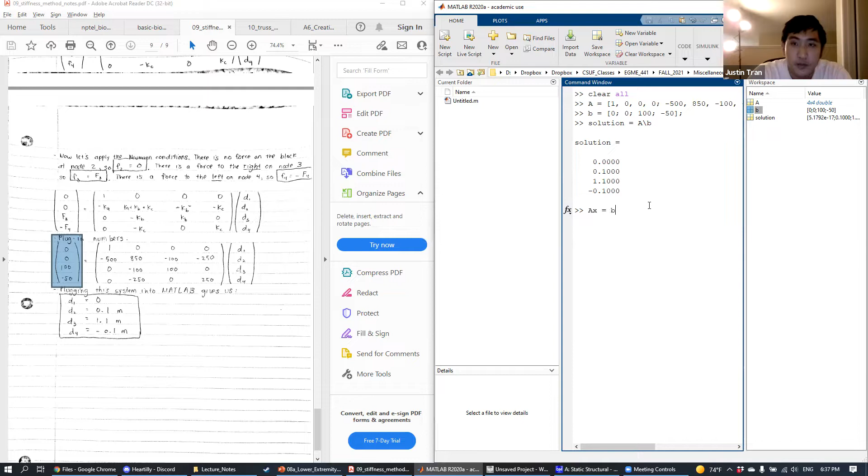So what exactly does the backslash do? Good question. One way you can think of the backslash is you have this linear system right here, A times X is equal to B. One way to think of it is you're basically multiplying both sides of the equation by the inverse of A. Normally you have AX equal to B. If you multiply both sides by A inverse, the A inverse cancels out the A's on both sides.

So you're going to have X equal to A inverse B. You can actually do that operation in MATLAB too. You can say solution is equal to INV, the MATLAB command for inverse, of A multiplied by B. You can do that and get the same thing. It's just that this method will work, but it's a tad slower than backslash, and a little more annoying to write because you do INV(A) times B.

So the backslash does the same result as this, but it uses a smarter algorithm. It uses a computational linear solver, which is a lot more efficient than trying to find the inverse of a matrix, because finding inverses of matrices is usually a pretty difficult task. But in essence, this is what it's doing.

Yeah, I really wish Sanders taught us that. It's a lot more convenient. MATLAB is a very diverse software, and I think everyone has different features that stand out the most for them. For me, I use MATLAB a lot to solve these linear systems, so that's why I think this is an important feature. But Dr. Sanders has his own features that he thinks are more important too. That's why I want to teach 205, because I want to get my chance to teach that stuff. Okay, any other questions on the MATLAB stuff?

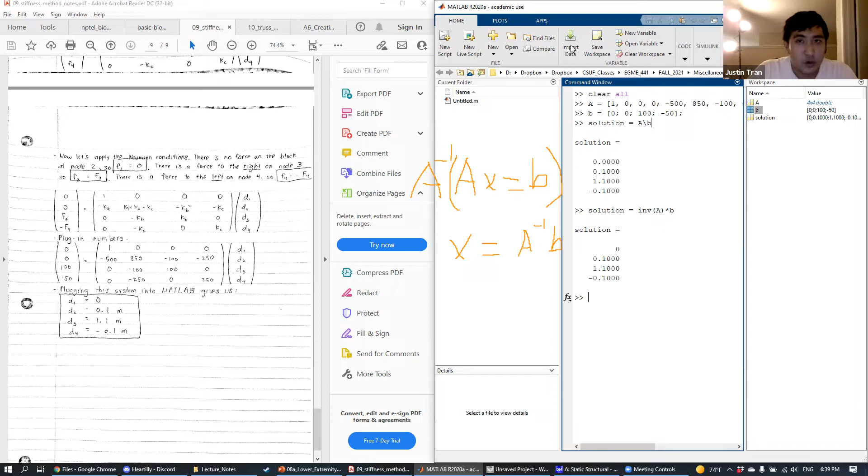All right, so the next topic that we'll pick up on next Tuesday is truss equations.

Up to this point, you've been introduced to what's formally known as the finite element method. The true finite element method is finding element stiffness matrices, assembling them into a global linear system, applying boundary conditions, and solving it. What you're doing in Ansys is Ansys basically automates all that for you, putting a nice graphical user interface on top. But at its core, that's what finite elements is all about, taking a physical problem defined by very complicated differential equations, and turning it into a linear algebra problem.

We saw that whole process unfold before our eyes with springs. But springs are not the most realistic thing. I mean, springs do exist, they're real stuff, but if you're talking about what actual real structures are made out of, we don't really use springs all that often.

So the next step up from springs is to use truss elements or bar elements in order to form a structure.

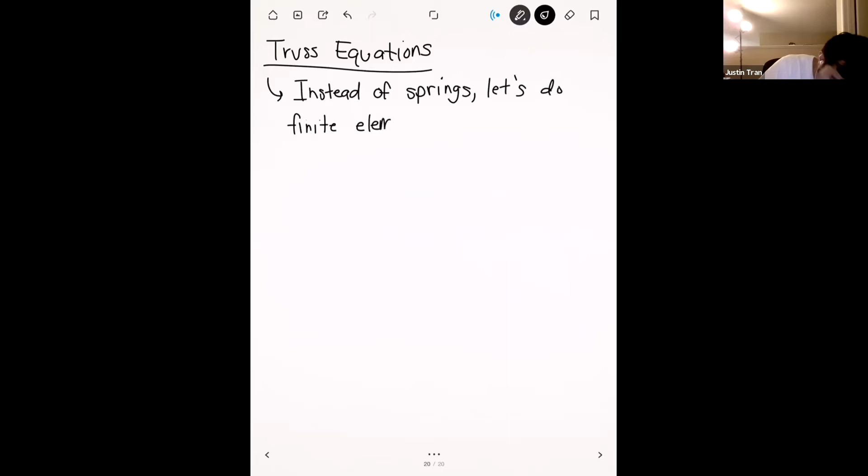So if we want to draw a truss element, it's not the most exciting thing in the world. A truss element is basically just a thin cylindrical rod, or in this case, a thin cylindrical bar. We can use these to build a lot of structures out of.

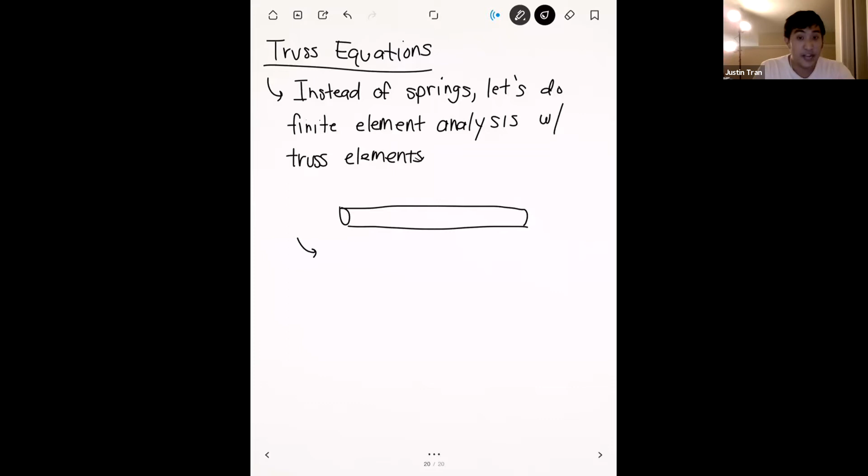Probably you guys have already learned the statics of how trusses work, so I don't need to explain that again. But we can actually use these in finite elements too, using the exact same method as the springs we just went over.

The biggest difference we'll see for truss elements versus springs is that the element stiffness matrix is going to look different. That's the only thing that's going to be different.

So on Tuesday, we're going to start with 1D truss problems, following the exact same process we just followed in the last example, for truss elements too. The only thing is that the element stiffness matrix will look different, because obviously a bar or truss element doesn't have a spring constant.

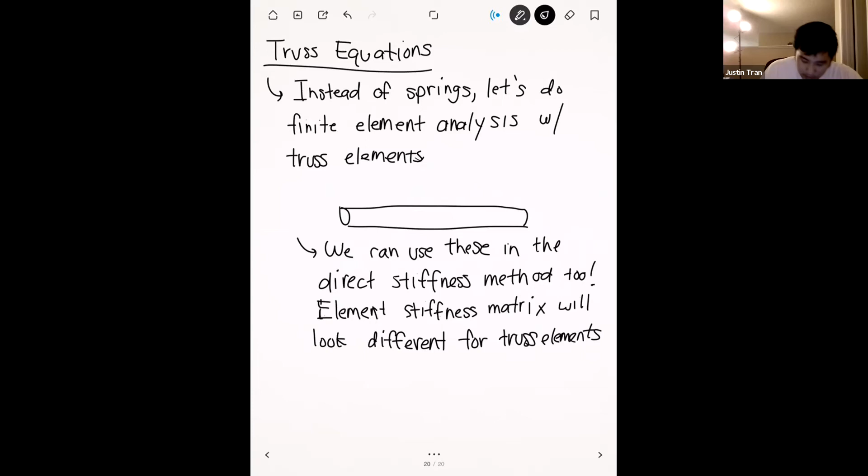So I'll give you a little sneak preview. On Tuesday we'll derive this and see how it works. But the element stiffness matrix for a truss bar looks like the following: it's a 2x2 system, just like before, but instead of the spring constant, we're going to have a combination of the cross-sectional area A, the Young's modulus E, and the length of the bar L.

Where A is the cross-sectional area, E is the Young's modulus of the material, and L is the length. So if you know those quantities, you can form the element stiffness matrix for the truss, and follow the exact same method that we just went over for the spring.

All right, any final questions on this before we wrap up for the week?